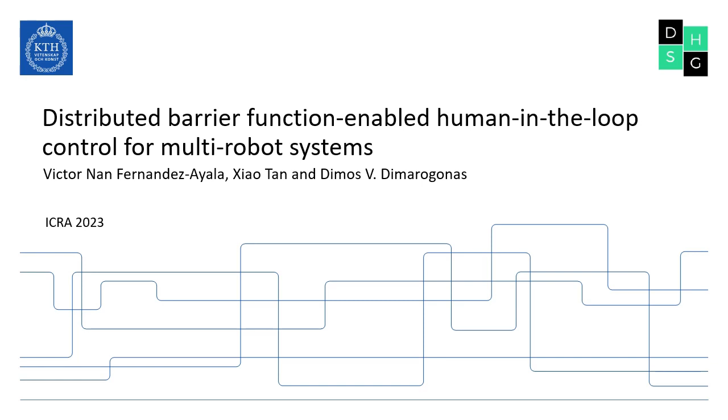In the following presentation, I, Victor Fernandez-Ayala, will present the publication titled Distributed Barrier Function-Enabled Human-in-the-Loop Control for Multi-Robot Systems, submitted to ICRA 2023. The main background element for this work are control barrier functions.

Essentially, they are a tool that allows us to ensure specific properties for our system. The idea is that we establish a safety set C, defined as the region of the problem space where a custom function h is greater or equal than 0. By using the CBF condition, shown in the equation below, as a constraint, we can ensure that the system will always remain inside this safety set.

More specifically, if u is locally Lipschitz, this condition will render the set forward invariant, meaning if we are inside the set, we will never go out. And if C is compact, it is also asymptotically stable, which means that if we are outside of the set in the unsafe region, the system will asymptotically converge towards the inside of the set, that is, the safe region.

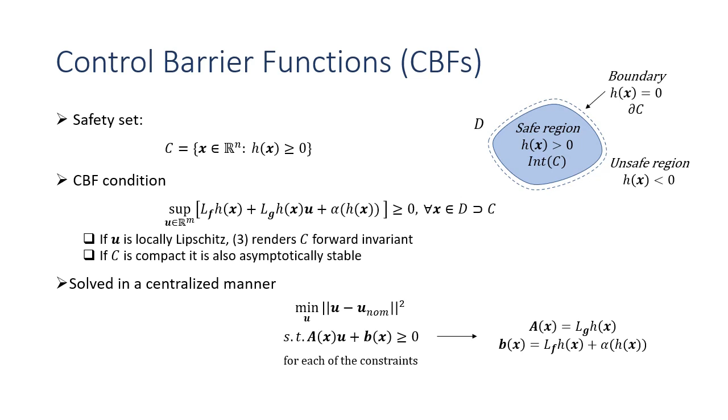Originally, this constraint will be simplified as a linear condition with coefficients a and b, and it will be solved as a centralized optimization problem.

In this first experiment, the centralized algorithm is shown for two different settings, both using a multi-agent system composed of 4 robotic agents with a nominal controller keeping them in a square formation.

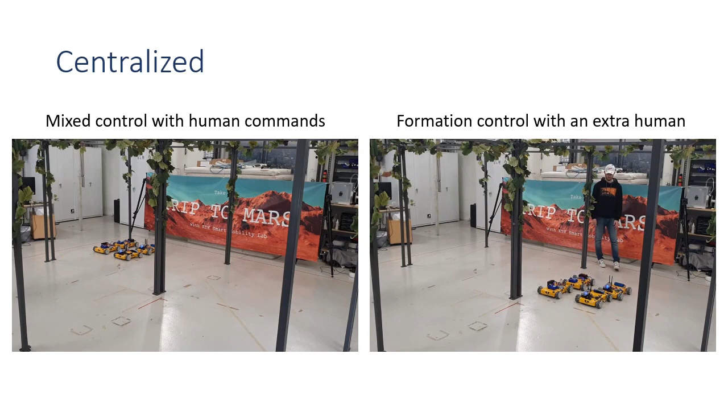The one on the left shows mixed control with human commands, where human inputs are sent with a handheld controller, and the optimization objective minimizes the norm between the output U and the human commands subject to the safety constraints.

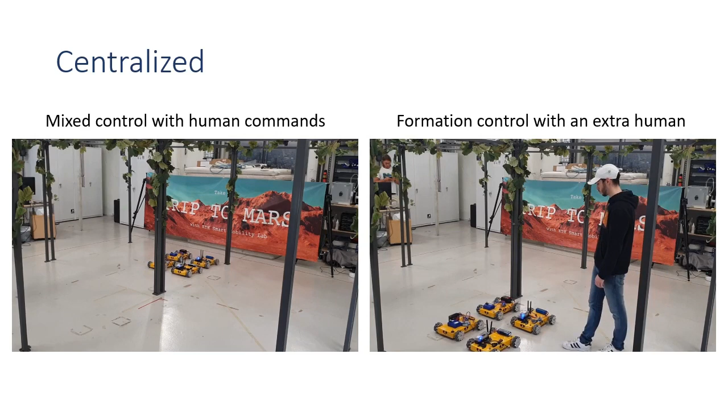The one on the right shows what happens when a human enters the arena and a collision avoidance constraint between robots and the human is added to the optimization problem, allowing the human to safely interact with the multi-agent system.

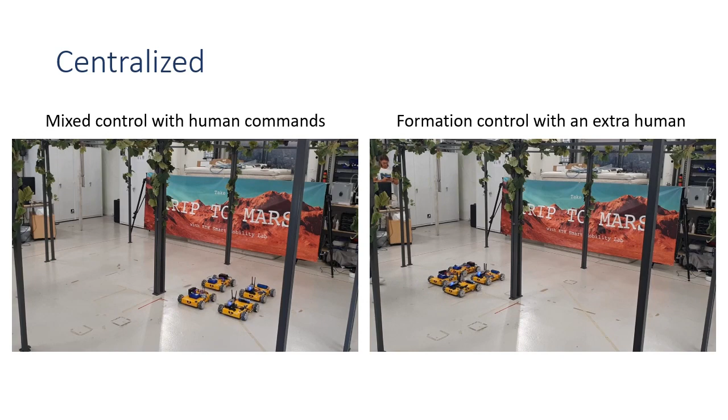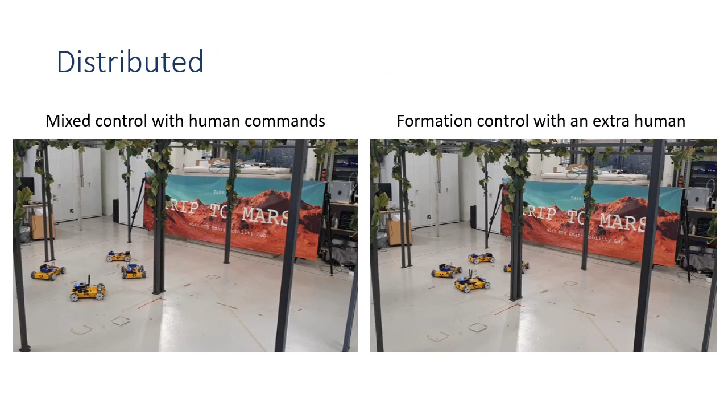In this second experiment, we saw the same setup as for the centralized algorithm, but with our new distributed one. This means we have the multi-agent system composed of 4 robotic agents with a nominal controller keeping them in a square formation.

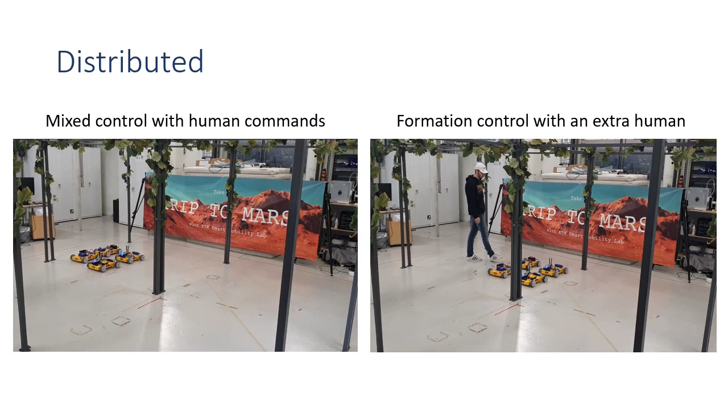The one on the left shows again mixed control with human commands, and the one on the right shows formation control with an extra human in the arena.

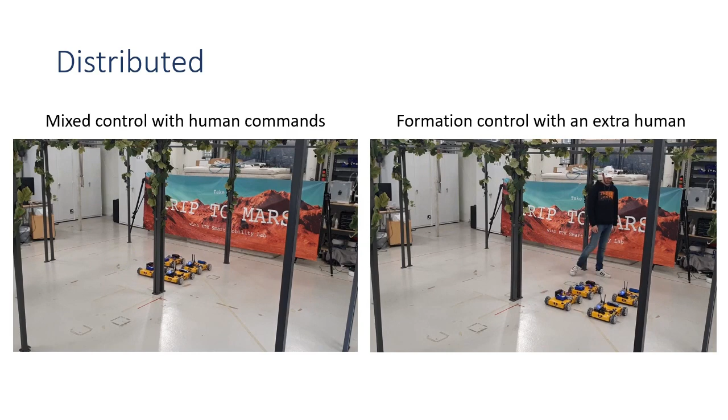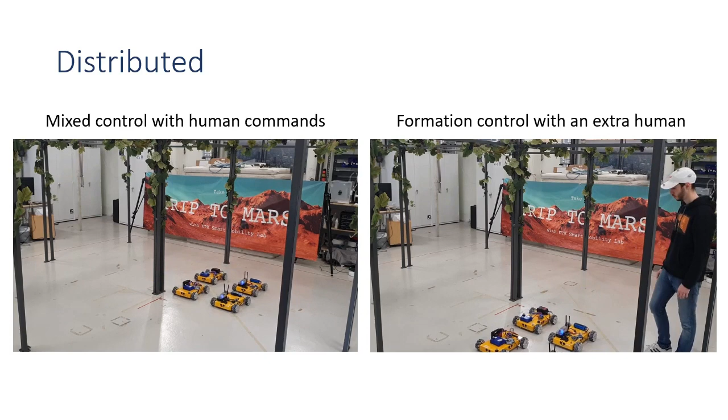As you can see, the behavior is quite similar to the centralized one, and it fulfills all the safety criteria, although it behaves with a bit more jerkiness. This is due to the delay introduced by the communication link between agents when solving the distributed optimization problem.